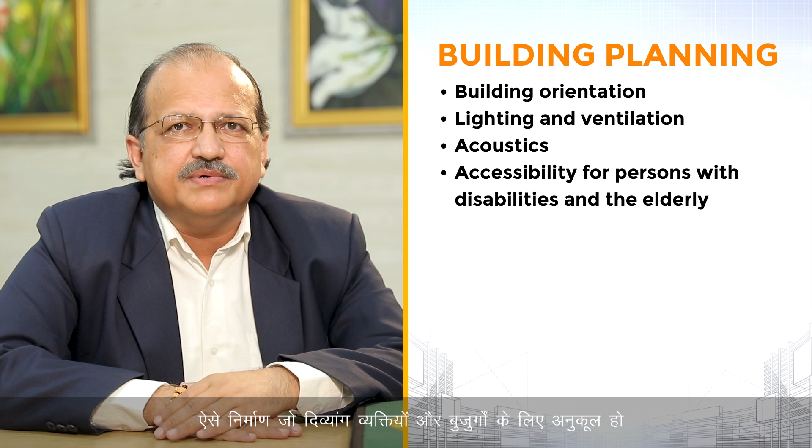In the process, BIS has formulated a series of standards on building orientation, lighting and ventilation, acoustics, and for accessibility of buildings and built environment for persons with disabilities and the elderly, on building materials and components, on various loading codes and structural design codes using various material streams for safe design of structures, on good construction practices including safety during construction and construction project management, and on disaster resistant design of structures including man-made disasters due to fire or natural disasters like earthquakes, cyclones and landslides.

Finally, the standards on smart and sustainable development. In addition, there are special publications including the National Building Code of India, which supplements the efforts of these standards.

Standardization is a dynamic process and all standards are reviewed periodically and if required, revised or amended from time to time. All stakeholders should copiously refer and use these standards for ensuring orderly, safe, accessible and sustainable development for transforming our rural and urban habitats.

Let's now hear from the Chairman of the Civil Engineering Division Council of BIS, Shri H.S. Dogra, about the vision and mission of the Council.

As you are aware, our country is on the path of rapid development. Large number of buildings and infrastructure projects are going on. It is therefore utmost important that quality is ensured of all these projects. This in turn requires input materials of a high quality and sound construction practice need to be observed.

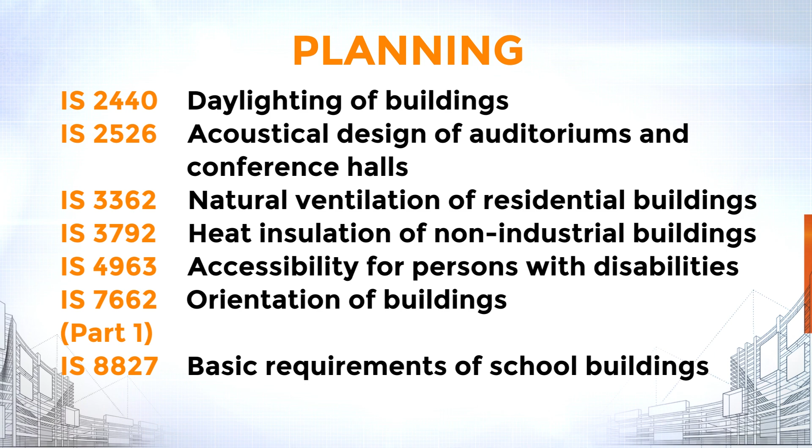Once you have the plan ready, the next critical step is to design the structure. The structural design is to be carried out to withstand various loads to which buildings are subjected during their service life. These are dead loads, imposed loads, wind loads, snow loads, and some special loads.

They are detailed in the loading codes IS 875 Part 1 to 5. Dead loads are due to weight of different parts of the structure itself. IS 875 Part 1 gives methods for estimating dead loads based on unit weight of materials and of miscellaneous materials.

Imposed loads are caused due to occupants and movable objects like furniture, machinery, and due to impact. Part 2 of IS 875 specifies the imposed loads for design purposes.

IS 875 Part 3 gives estimation of wind loads based on the prevailing wind speed zones, denoted as basic design wind speed. It also takes into account factors such as size and height of a building and closeness with other buildings. IS 875 Part 4 covers estimation of loads due to snow as prevalent in many hill districts frequented by snowfall in the country. The estimation of earthquake forces is covered in IS 1893 Part 1.

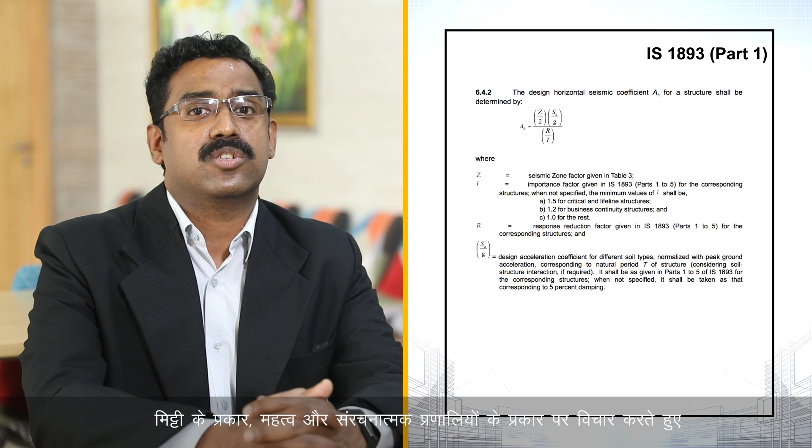This standard guides in structural design considering the seismic vulnerability, soil type, importance, and type of structural systems. A judicious combination of all these loads, as also some special loads such as temperature and vibration loads, are covered in IS 875 Part 5.

This covers design of both traditional and modern buildings, with design codes dedicated to a vast variety of material streams, including masonry, timber, bamboo, plain and reinforced concrete, pre-stressed concrete, steel, or of modern prefabricated and pre-engineered and glass facade buildings. Here is a list of key standards for structural design.

It's time to now dig a little deeper into this very important aspect of building and infrastructure construction. You must have heard the notion, you can't build a great building on a weak foundation. This is a reality. Now let's go to our expert who will throw some more light on this subject.

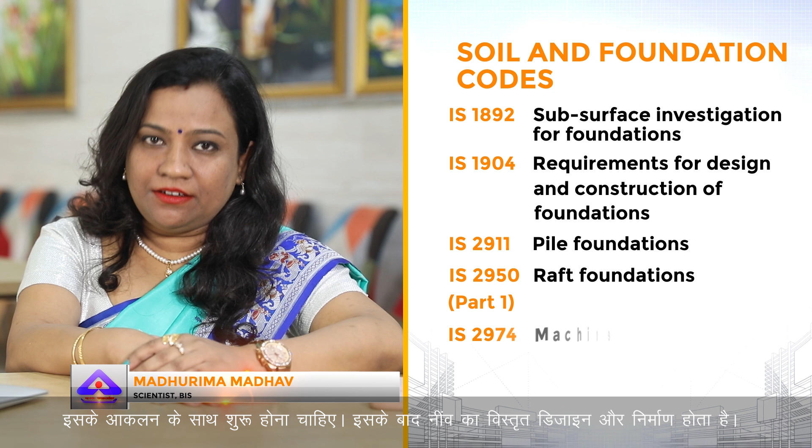Design of foundation for buildings and structures has to begin with proper subsurface investigation and assessment of bearing capacity of soil. This is followed by detailed design and construction of foundations. A series of standards has been made available to cover all these and allied areas.

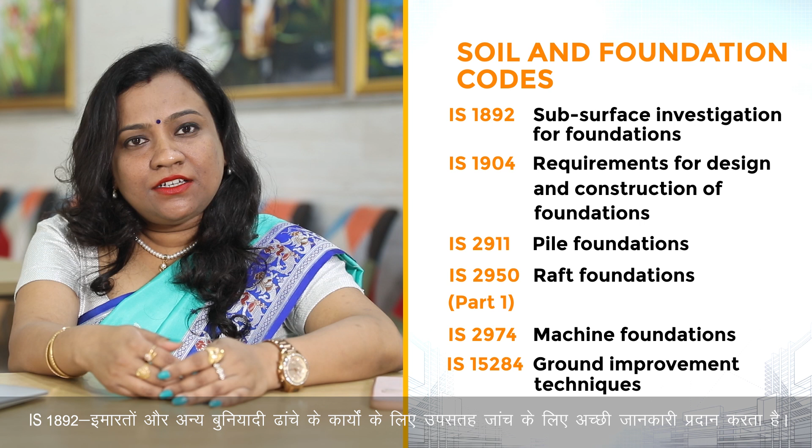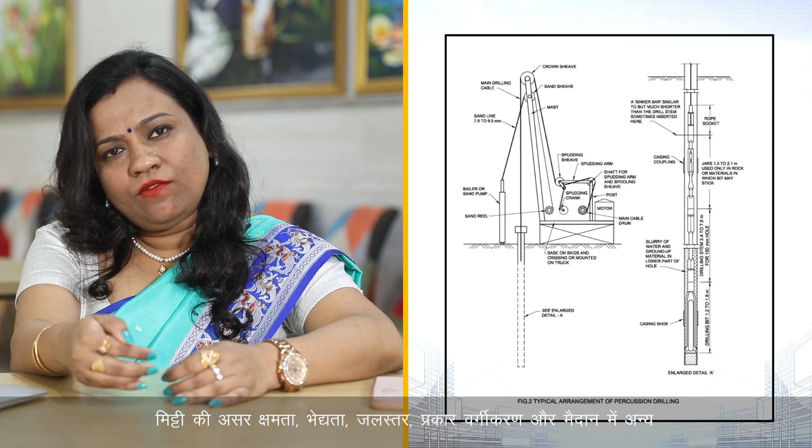IS 1892 provides good practices for subsurface investigation for buildings and other infrastructure works. The methods of subsurface investigation enable vertical sections of the strata to be drawn and samples to be tested on the site or in a laboratory for determining shear strength parameters, bearing capacity of the soil, permeability, water table, type classification, and other geophysical information in the field.

This information, together with the normal topographical survey, provides the engineer with complete details of the site and enables him to prepare safe and economical designs for the foundations. Foundations can be shallow foundations, deep foundations, or special foundations.

Pile foundations are deep foundations principally used to transfer the loads from superstructures through weak compressible strata or water onto stronger, more compact, less compressible and stiffer soil or rock at depth, increasing the effective size of a foundation and resisting horizontal loads.

BIS has therefore formulated IS 2911 on design and construction of pile foundations in different parts and sections. Part 1 of IS 2911 covers various types of concrete piles in its 4 sections. Section 1 covers driven cast in situ concrete piles.

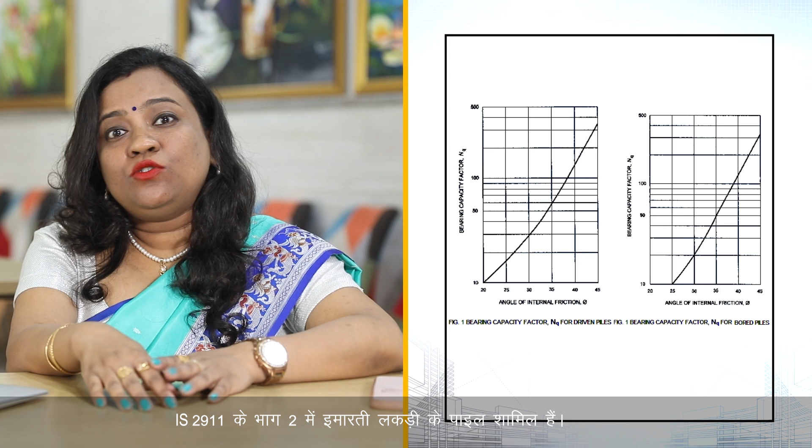Section 2 covers bored cast in situ concrete piles. Section 3 covers driven precast concrete piles. Section 4 covers precast concrete piles in pre-bored holes. Part 2 of IS 2911 covers timber piles. Part 3 covers under-reamed piles and Part 4 covers load test on piles.

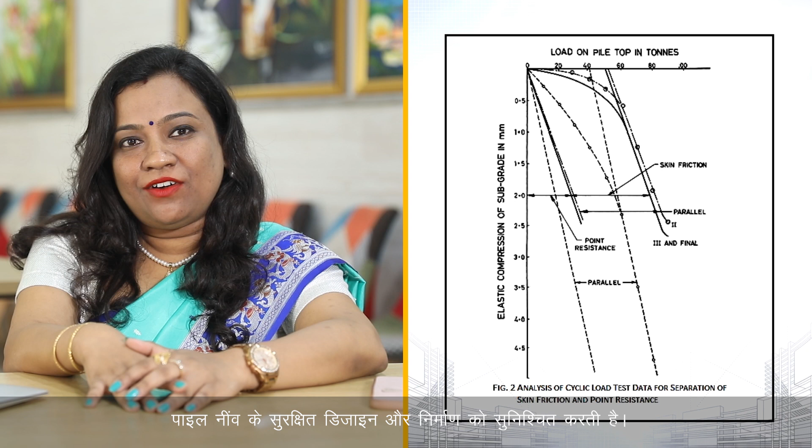Together, the above series of standards ensure safe design and construction of pile foundations for buildings and other structures. Before we move on to the next segment, let me show you 2 maps that directly connect to the structural design of buildings and other structures. These are about 2 forces of nature that cannot be overlooked while planning any building structure anywhere.

The seismic zoning map of India, brought out by BIS, as per which the parts of the country are categorized into 4 earthquake zones: Zone 2, 3, 4 and 5, in order of increasing severity. The map also reveals that around 60% of Indian landmass is prone to earthquakes.

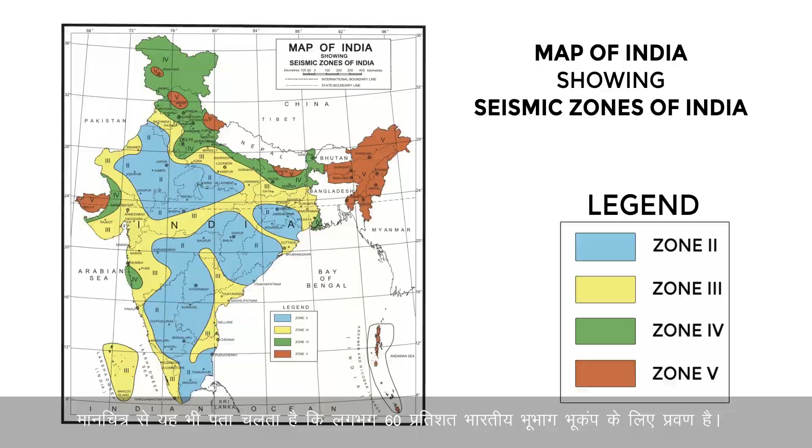The standards specified by BIS enable design and construction of buildings and structures, ensuring safety against earthquakes likely to occur at the location of the structure. Standards related to this include...

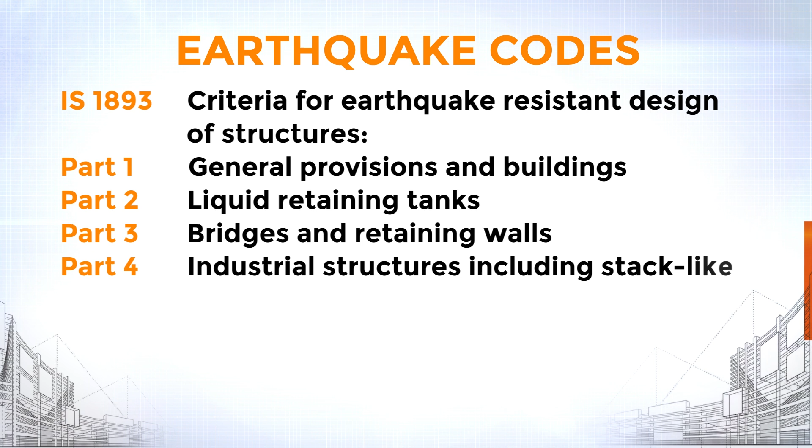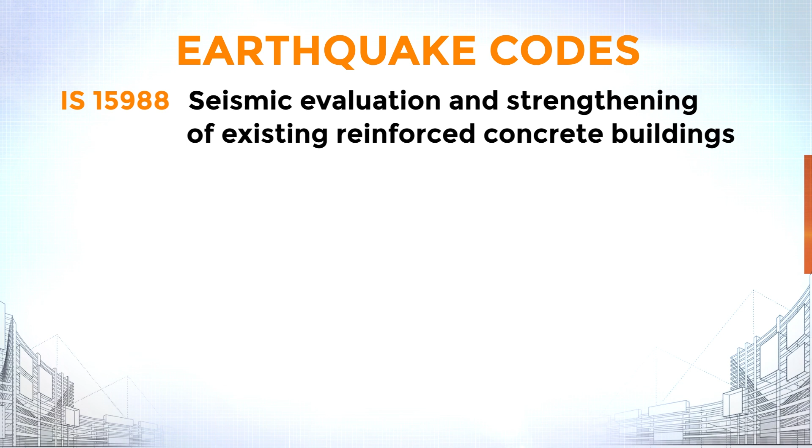Also take a look at the wind zoning map of India, brought out by BIS, as per which parts of the country are categorized into 6 basic wind speed zones. This includes coastal areas which experience very high and cyclonic winds.

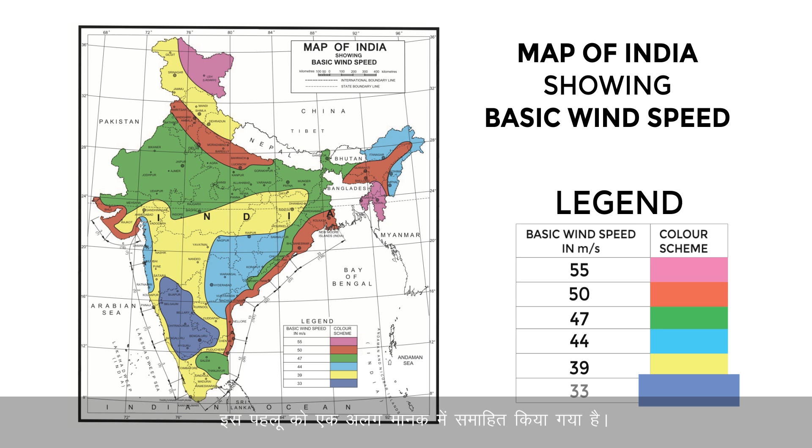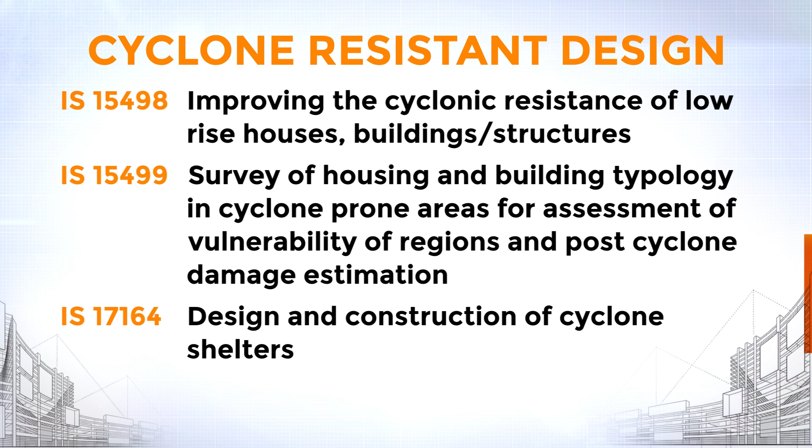This aspect has been covered in a separate standard, IS 875 Part 3, dealing with wind loads. There are a few other standards dealing with cyclone resistant designs which are listed here. We will talk in further detail about safety against natural disasters.

For now, let's go back to yet another key aspect of buildings, shall we? The quality of a building or a structure depends on the quality of the building materials used in them. Setting standards for them becomes even more important since they are responsible for a substantial amount of investment in the overall cost of any structure.

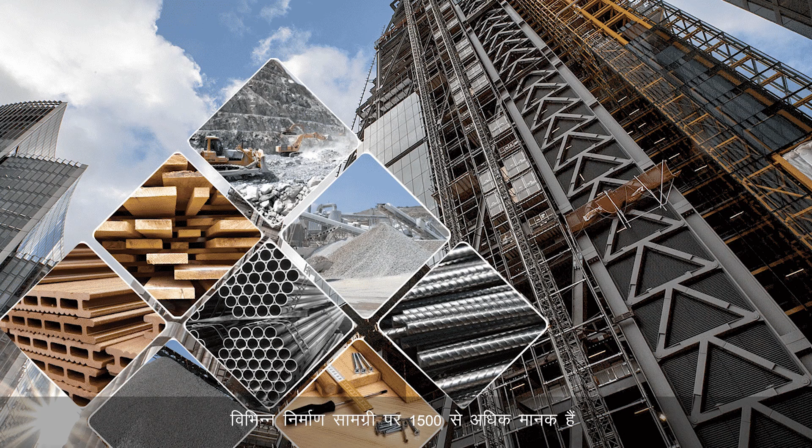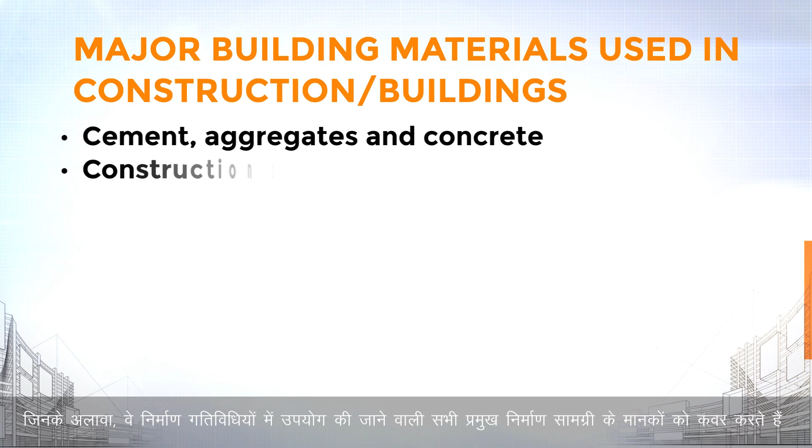There are over 1,500 standards on various building materials prescribing their quality, performance, packing and marking requirements. Among others, they cover standards for all major building materials used in construction activities, ranging from cement, concrete, building stones, wood products, sanitary appliances and pipes, and so on and so forth.

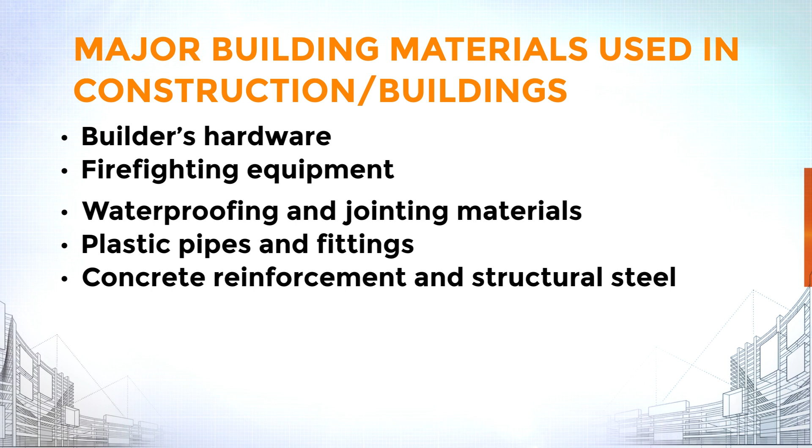Now let's go to our expert who will throw some more light on this subject.

For the selection of any building material for a specific type of construction, it is very important to know about their engineering properties like mechanical, chemical and thermal properties. BIS has therefore formulated different Indian standard specifications on building materials like cement, aggregate, reinforcement bars, ceramic tiles, concrete tiles, paver blocks, timber, bamboo, flush door, plywood and other panel products, and other flooring, wall finishing and roofing materials.

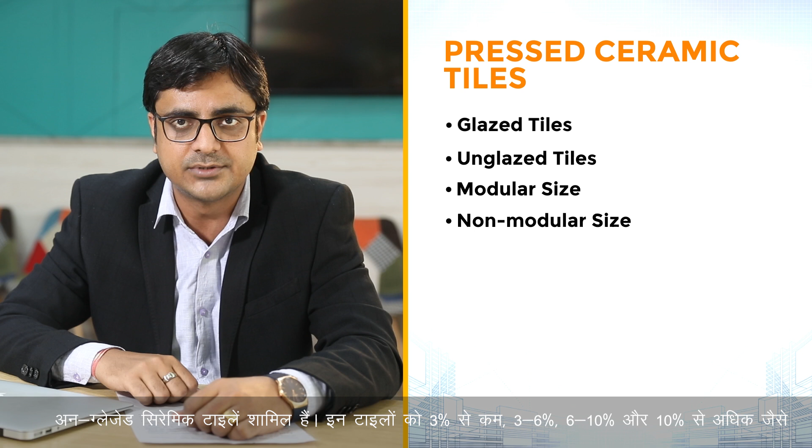For example, IS 15622, Indian Standard Specification for pressed ceramic tiles. This standard covers glazed as well as unglazed ceramic tiles of modular and non-modular sizes. These tiles are further classified on the basis of their property of water absorption, like less than 3%, 3 to 6%, 6 to 10%, and more than 10%.

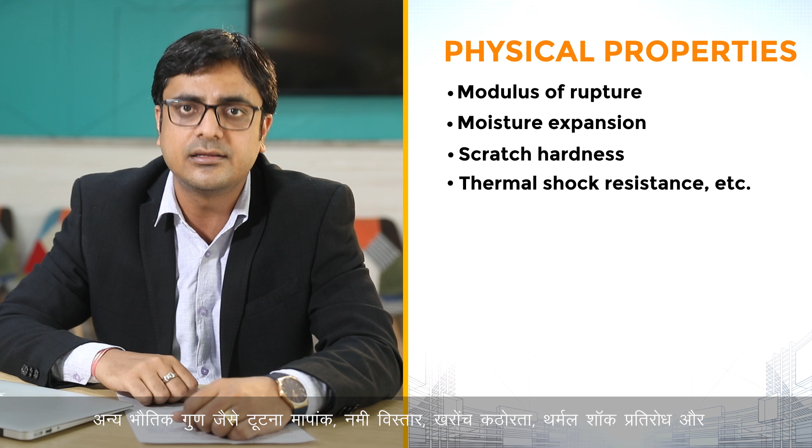Other physical properties like modulus of rupture, moisture expansion, scratch hardness, thermal shock resistance, and chemical properties like resistance to stain, household chemicals, acid, alkalis, etc. are covered in the standard. These properties are helpful to the user in selection of tiles as per their requirement.

Apart from quality of materials, good construction practices also play an important role in overall construction quality. BIS has therefore formulated many Indian standards as codes of practice for installation, erection and laying of various building materials and components. For example, IS 1443, Code of Practice for laying and finishing of cement concrete tiles.

In this Indian standard, use of different materials of required quality, method of preparation of mortar, laying of tiles, skirting, grinding, polishing and subsequent maintenance has also been detailed, which are helpful for proper laying performance during their use. We can surely say in this area nothing is left to chance.

Let me now list out some important standards in this domain.

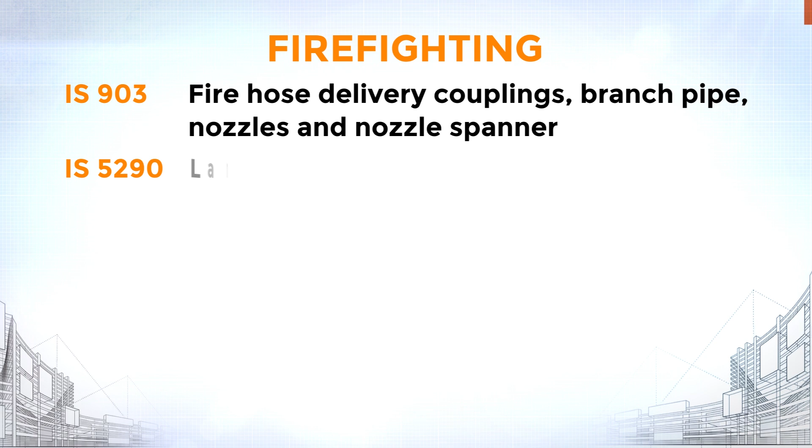After ensuring conformity of their products to the concerned Indian standard, BIS grants license to building material manufacturers under the BIS certification mark scheme. Only after acquiring this license are they allowed to use the BIS standard mark, popularly known as the ISI mark. Before we move any further into any other operational area of civil engineering, I would like to take you to a factory to see the actual process of manufacturing, testing and ISI marking of representative building materials.

We are producing 500 meter cube AAC block over here, and we have certified with the ISI mark, and we are following the IS code 2185 and manufacturing the best quality of product, and it is well accepted in the market. We are following the national as well as the international standard, and here we have a very good laboratory for the quality control purpose, and it is totally fully automated plant.

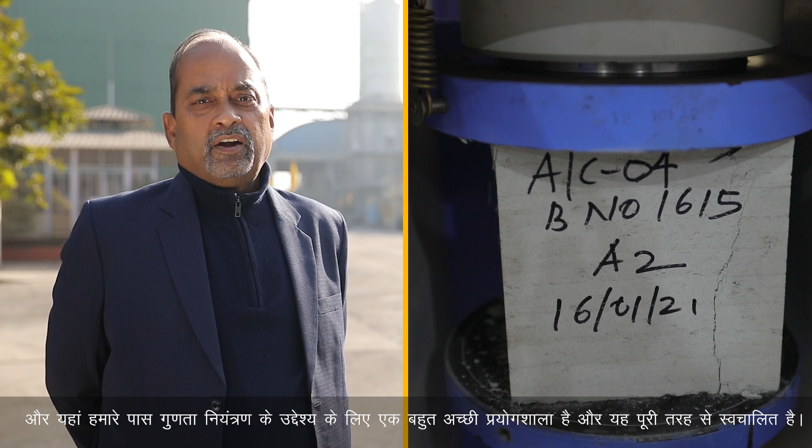Moving on from building materials, BIS has also formulated standards on special structures. The structural design ensures that a structure has sufficient strength, adequate ductility, and under external loads can remain as one integral unit. This assumes significant importance in case of special structures like chimneys, bins and silos, shell structures, water tanks.

Cooling towers, tall buildings, composite construction and transmission line towers, for all of which there exist design standards. These form the backbone of infrastructure development of the country.

As the buildings are growing taller and taller, the new standard IS 16700 needs special emphasis for its use in design of tall buildings of height up to 250 meters and beyond. The standard is based on the prescriptive approach, covering design aspects like selection of appropriate structural system, geometric proportioning of building, integrity of structural system, resistance to wind and earthquake effects.

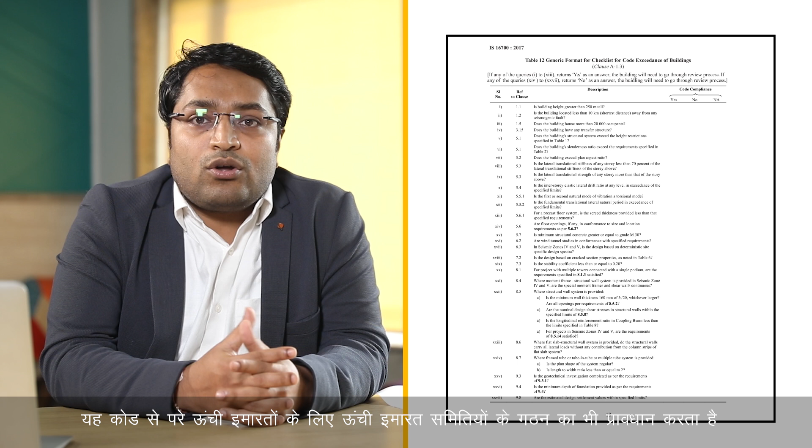It also provides for constitution of a tall building committee for code exceedance tall buildings, and lays down the procedures for design and approval process of such buildings.

The Indian Standard on Cooling Towers, IS 11504, essentially deals with the safety concepts, structural design and construction consideration of reinforced concrete hyperbolic natural draft cooling towers. Provisions of the standard are applicable to all common cooling tower shapes formed by conic sections. The tower design consideration includes size and shape, spacing among towers, tower shell analysis, shell supporting structures and foundation and auxiliary structures.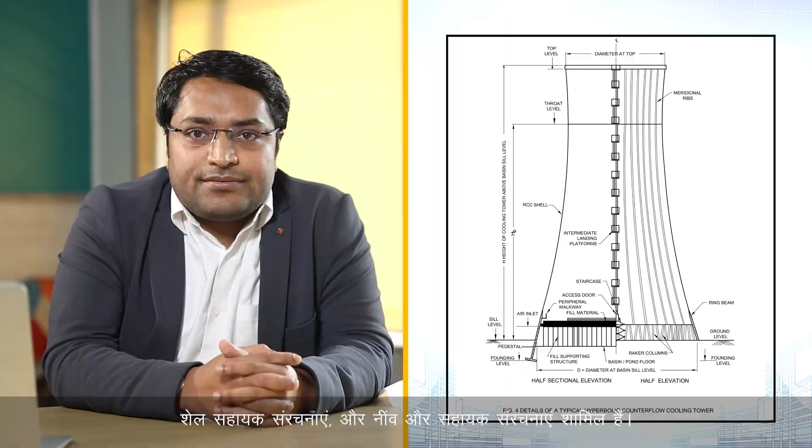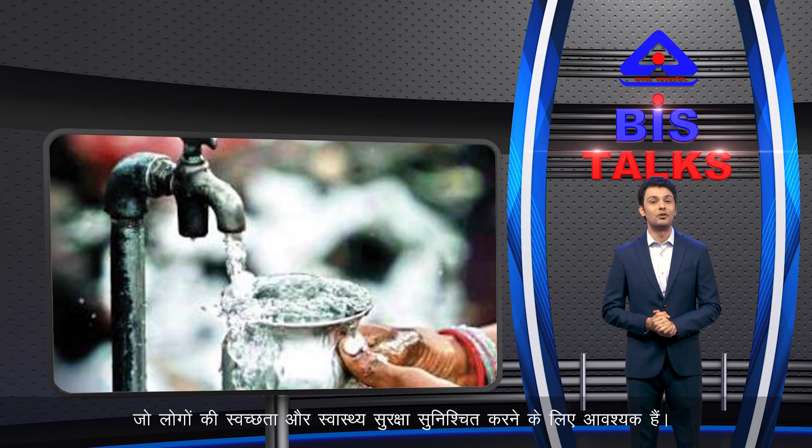Now for a few other crucial things important for modern living, like water for drinking and other purposes, efficient drainage system and sanitation facilities in buildings that are essential to ensure the hygiene and health safety of people. BIS has formulated a series of Indian standards to cover all these important areas.

Efficient execution has to match good intentions, which means good planning and structural design aren't enough. It's also of utmost importance that the actual execution at site follows best practices. With this in mind, BIS has formulated a series of Indian standards on good construction practices. A few of them are listed here.

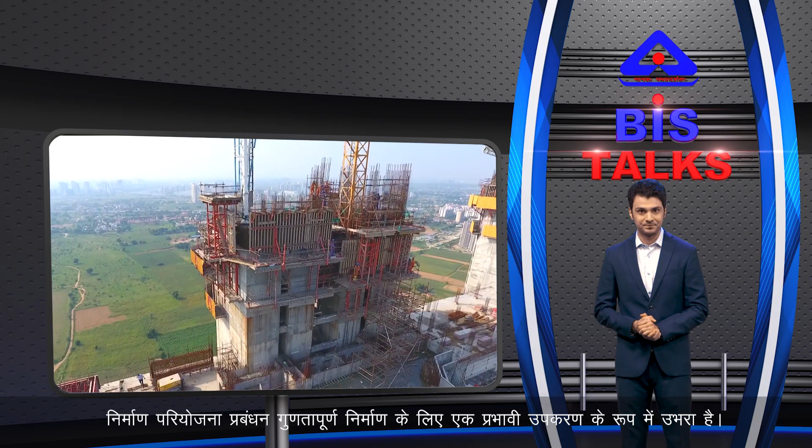Construction project management has emerged as an effective tool for quality construction. It helps prevent accidents at site and time and cost overruns. Standards of various operational areas of construction project management are handled by the multiple parts of IS 15883. Here's a complete list.

That apart, IS 16416 gives the specifics for project formulation and appraisal of construction project management. The building structure is ready, but without proper maintenance, it's likely to lose its structural integrity and best functional abilities soon. Adequate and efficient maintenance of buildings and its various engineering services ensure continued durability, long life, and service life of the built facility. A number of standards have been developed to address this concern.

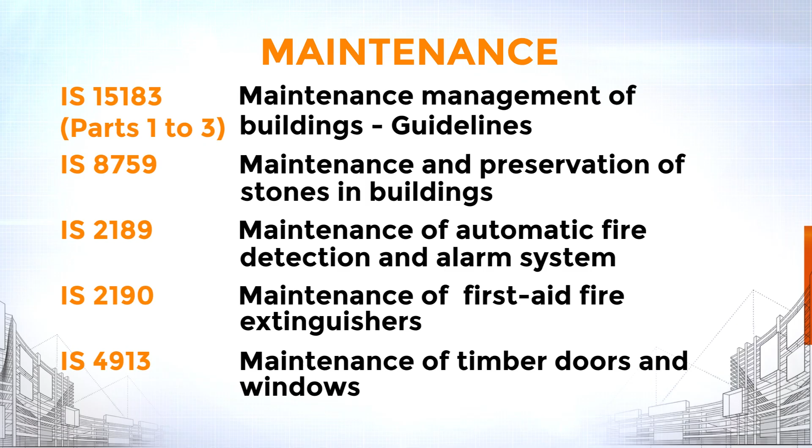As we all know from experience, construction activities are also prone to various hazards and accidents. This often leads to loss of life, property, and endangers investment if due care is not taken. BIS has therefore brought out a series of safety codes to be followed during various stages and activities during construction.

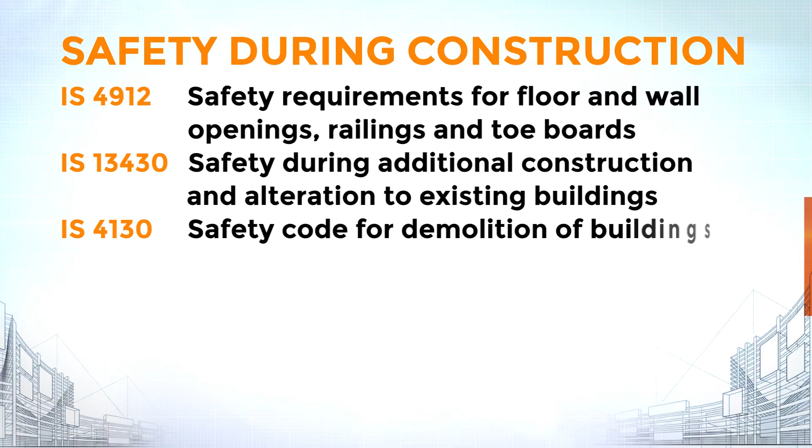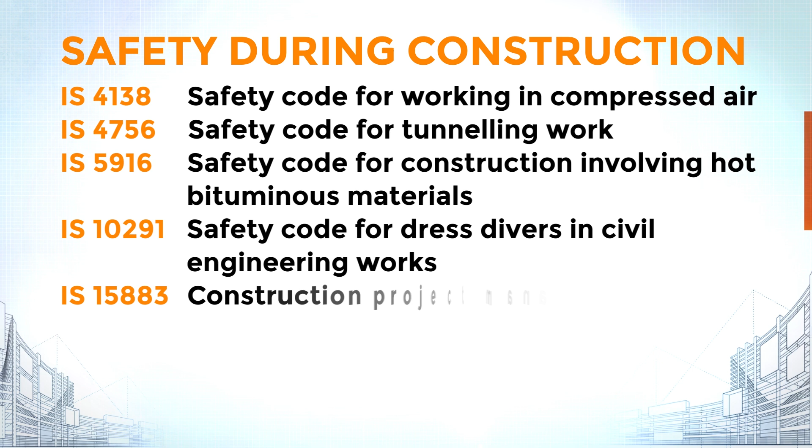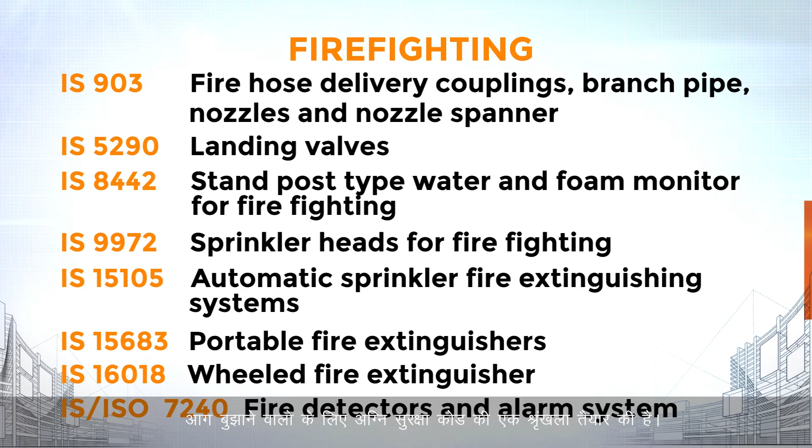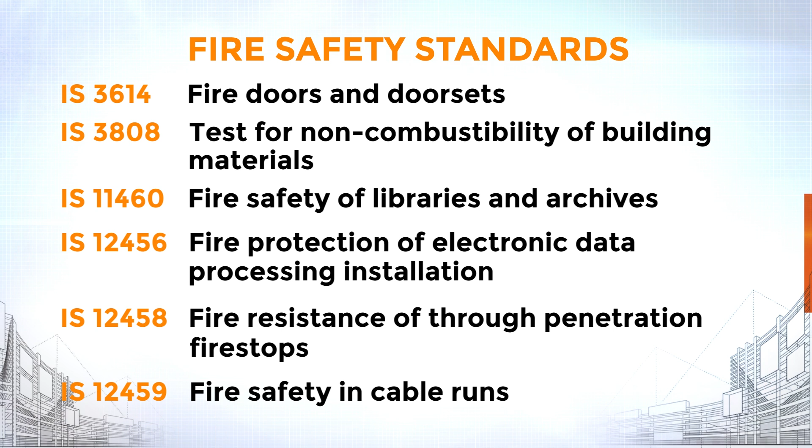Did you know that India remains one of the most disaster-prone countries in the world? Believe it or not, more than 50% of our people live in areas vulnerable to natural calamities of one type or the other. Without addressing this concern, no building or structure could be considered safe in India. We need standards that ensure our safety against natural disasters like earthquakes, cyclones, and landslides. Keeping this in mind, BIS has formulated a series of standards in the areas of earthquake engineering and cyclone-resistant design of structures. These we have already discussed while talking about structural designs. Now let's go to our expert who will throw some more light on this subject.

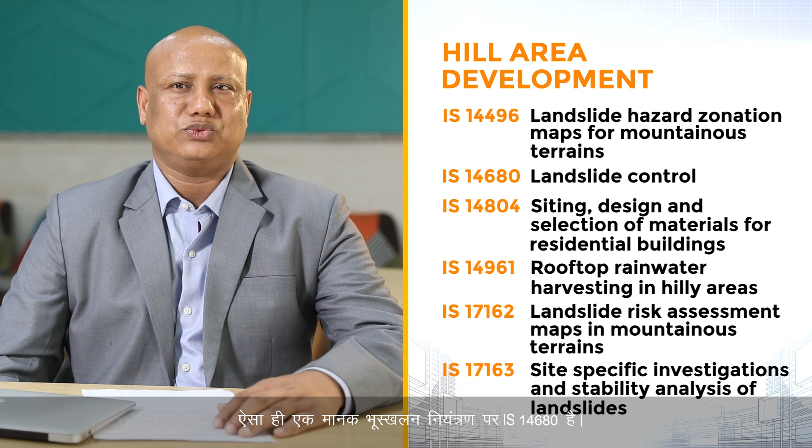Hill areas in the country are experiencing rapid urbanization and development activities during the last 2 decades. Unplanned activities have been mainly responsible for the increased incidents of landslide. BIS has therefore formulated a series of standards such as on landslide control, retaining wall, landslide zonations and risk assessment maps. One such standard is IS 14680 on landslide control.

It covers landslide classification on the basis of 5 principal types of mass movement such as falls, toppling, slides, lateral spread, flow, and a combination of 2 or more of these principal types of movement. It also recommends remedial measures of landslide prevention. Retaining walls play a major role in prevention of landslide.

BIS has formulated a series of standards as IS 14458 Part 1 to Part 6 for selection, design and construction of various types of retaining walls. Further, the Indian standard IS 14496 Part 1 and 2 for landslide hazard zonation mapping is quite essential for identifying the areas with minimum landslide hazards.

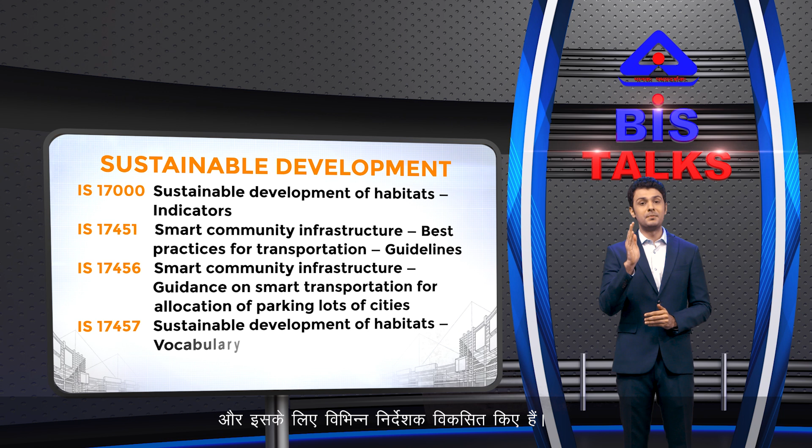After that brief outing to the hills, now back to the cities. As we all know, rapid urbanization is the call of the hour today. This, however, also raises concerns. Development, if not done properly, may lead to issues like environmental degradation and consequently have an adverse impact on the health and quality of life.

To address this issue, BIS has embarked upon formulation of standards on sustainable development and developed various indicators for the same. Smart cities act as an aid to sustainable development. BIS has framed and is working on standards for smart and resilient cities, smart transportation, smart parking lot allocation, among many others.

We did look at lots of areas till now in this edition of BIS Talks. Most areas are directly connected to civil engineering, but that's not all that CED handles. Construction workers are the vital force that make construction possible. Their safety and security is also given prime importance.

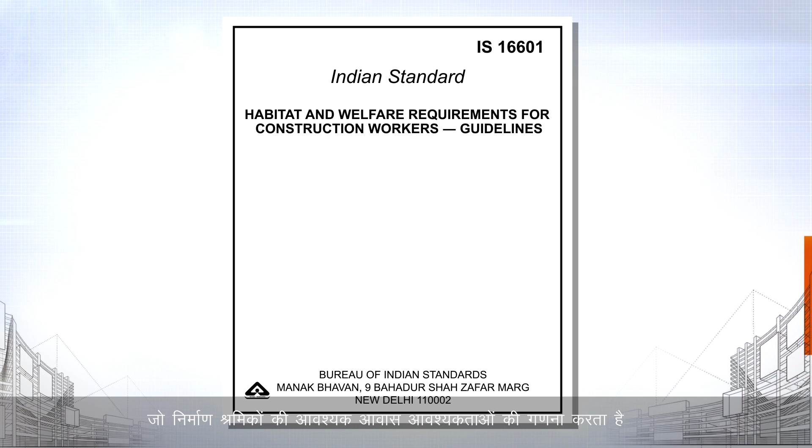Housing provided to construction workers as part of the employment contract should meet certain minimum requirements in respect of the nature and standard of the accommodation and facilities to be made available. BIS has formulated a standard, IS 16601, on habitat and welfare requirements of construction workers, which enumerates the essential habitat requirements of construction workers like well-lit and well-ventilated dwelling space, sanitation and healthcare, water including drinking water provisions, childcare facilities, and security of lives and properties.

Standards are not just meant to serve the well-to-do sections of the society. We also have standards that are specific to benefit the economically weaker sections. Affordable housing is a necessity to help bring housing within reach of all, including economically weaker sections of the society. BIS has formulated a standard, IS 8888, that provides a guide for planning such as layout pattern, plot area, density, building height and community open space.

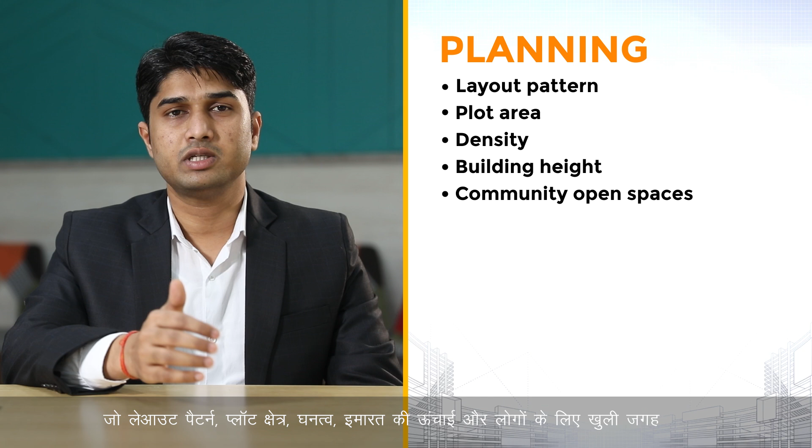It also prescribes general building requirements of low-income housing for various parts of building, including requirements of lighting and ventilation and sanitation facilities. To fulfill the needs of speedier building construction, BIS has come up with a standard IS 15916.

The standard covers provisions regarding modular planning, component sizes, prefabrication systems, design considerations, joint and manufacture, storage, transportation and erection of prefabricated concrete elements. It also gives design requirements to help prevent any progressive collapse of such buildings.

By now, being a stakeholder, you must also be wondering, where do you get all your information from? We did provide you with some inputs here, but this might not be specific to your queries, right? Simple. Just refer to the National Building Code of India, also called the NBC. This comprehensive publication has answers to all your queries. And we also have an NBC expert with us who will educate us more.

National Building Code of India, or NBC, the building code for the nation, is the prestigious special publication of BIS. The code was first formulated at the instance of Planning Commission in 1970 and subsequently revised in 1983, 2005 and 2016. NBC 2016 has been brought out by the National Building Code Sectional Committee CED 46 through its 22 expert panels involving around 1,000 experts.

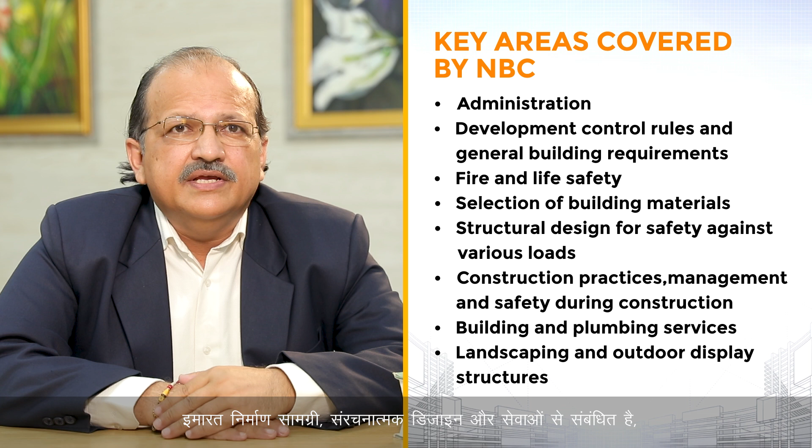It reflects the state-of-the-art and most modern provisions for building planning, structural design and various building and plumbing services. The code deals with administrative and technical provisions such as development control rules, general building requirements, building materials, structural design and services essential for sustainable land development and building construction.

It is used by the building regulatory departments to frame their building bylaws, by the government construction department and private construction agencies in their construction activities, and by building professionals like architects, civil and structural engineers, town planners, building services engineers, landscape architects in their professional practice, by academic institutions for imparting technical education in architecture and civil engineering.

An exclusive session of BIS Talks on NBC is also available. Get to know more insights about the code from it. Apart from the NBC, the Civil Engineering Department of BIS has come up with various special publications addressing the concerns of specific key areas within the domain of civil engineering. We bring you a representative list here.

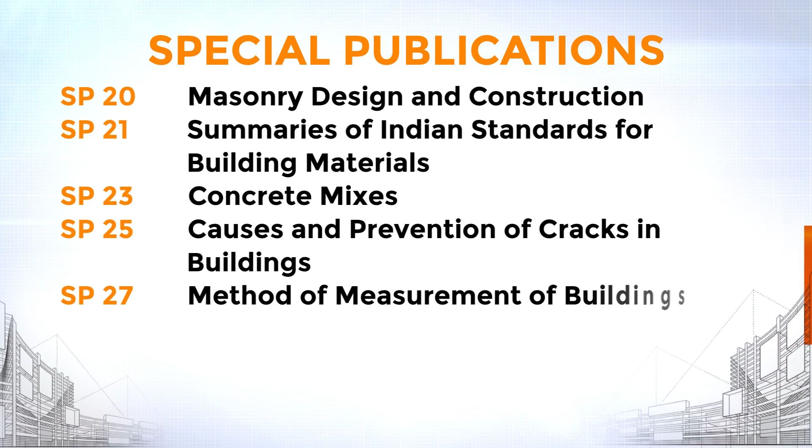The Indian standards in civil engineering formulated by BIS form an integral part of technical education imparted by IITs, NITs, state engineering colleges and private institutions.

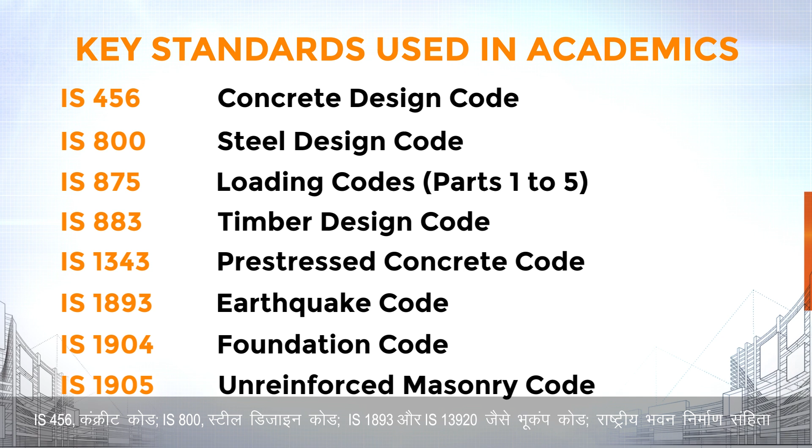The most important ones are related to planning, structural design, construction practices and management, and those relating to fire and life safety, lighting and ventilation, engineering services and plumbing services like water supply, drainage and sanitation. Key standards used in academics are IS 456, the concrete code, IS 800, the steel design code, the earthquake codes like IS 1893 and IS 13920, the National Building Code.

In the development of building structures and facilities, 5 tenets of quality need to be adhered to. These are safety, functionality, sustainability, aesthetics and economy. The Bureau of Indian Standards has developed numerous standards which provide a fine balance of these 5 tenets.

Students, the future architects and civil engineers, learn the seriousness of their profession from the early days in their lives, from when the importance of these minimum essentials is emphasized through the daily use of standards in the classrooms. Therefore, standards are made a mandatory part of technical education at the bachelor's, master's and doctoral levels. Also, each course in architecture and civil engineering degree programs brings a few of the standards into focus for students.

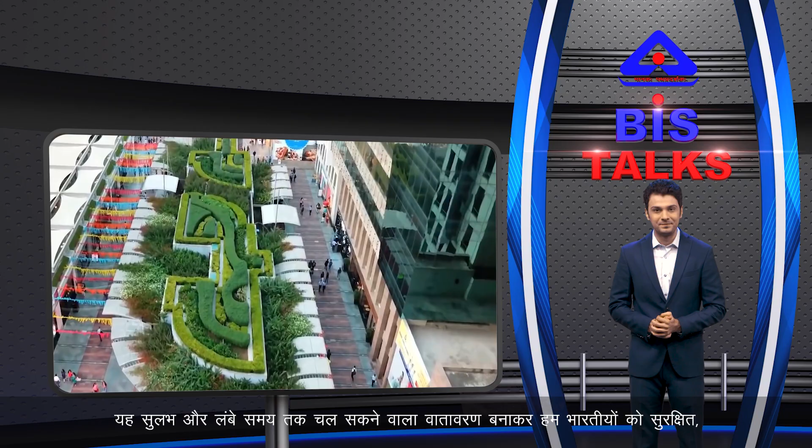With impeccable standards, BIS aspired to be at the heart of every structure of urban and rural India, keeping you safe, secure and comfortable, by creating a safe, accessible and sustainable built environment, giving us Indians the quality of life we deserve. Not only does BIS ensure compliance of available standards, we also continuously work to bring new topical areas under the fold of standardization to keep pace with the requirements in various fields.

It's only through strict adherence to standards in civil engineering we will be able to build the cities of today that fearlessly embrace our tomorrow. We have to do this for India, for every Indian, and we have to do this as a team. And that means you, me, all of us together.